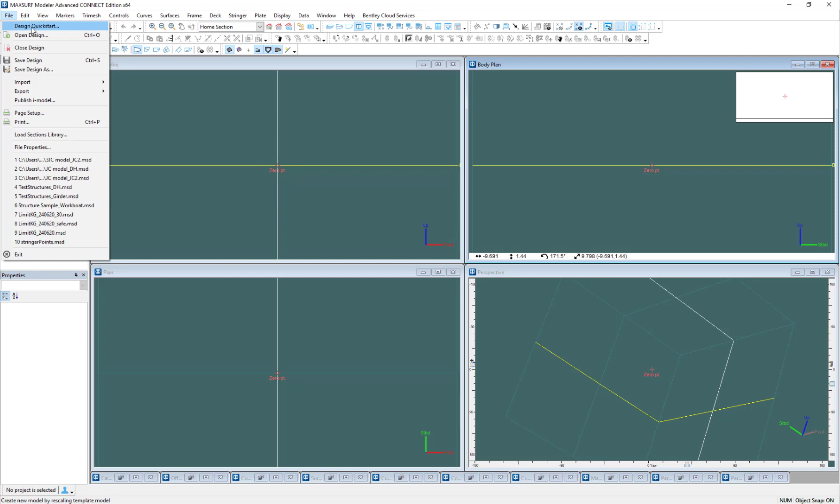Now, I've seen a few models recently where users have gone and made some very complex setups for doing boundary surfaces for complex tanks, and it doesn't need to be particularly complex. So I thought I'd just walk through what we need to do, so you've got a better idea of it.

Sorry, curves, linear curve here. So I'm just going to create a boundary tank like this. Everything's locked, so just my curve is there. And then I can extrude that 80 meters forward. Let's take a quick look at that in my perspective view here. So that's what I'm looking at.

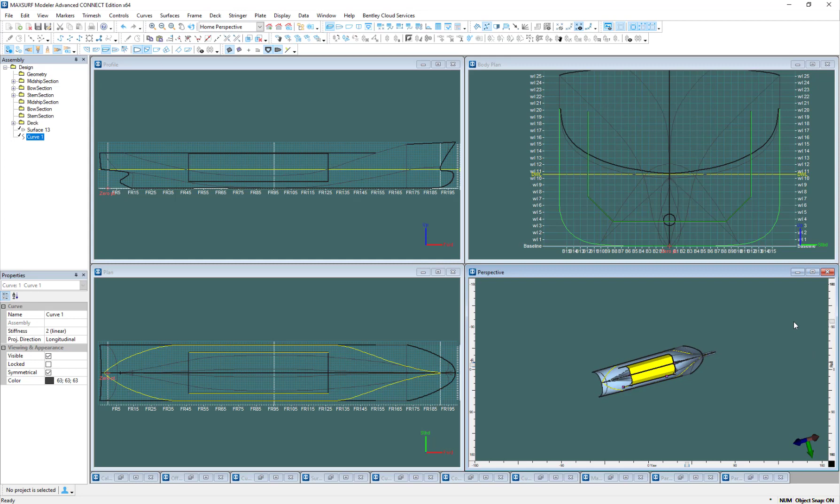Now, actually, I think I'd like to put a bit of shape in there so it tapers towards the forward end. Maybe it needs to go further forward before I do that. So here we can see that it's sticking outside of my hull. So I'm going to add another column of control points here. And we can see it's gone and tried to put in a row instead. They're the wrong way around. So let me transpose that. Swap column axes.

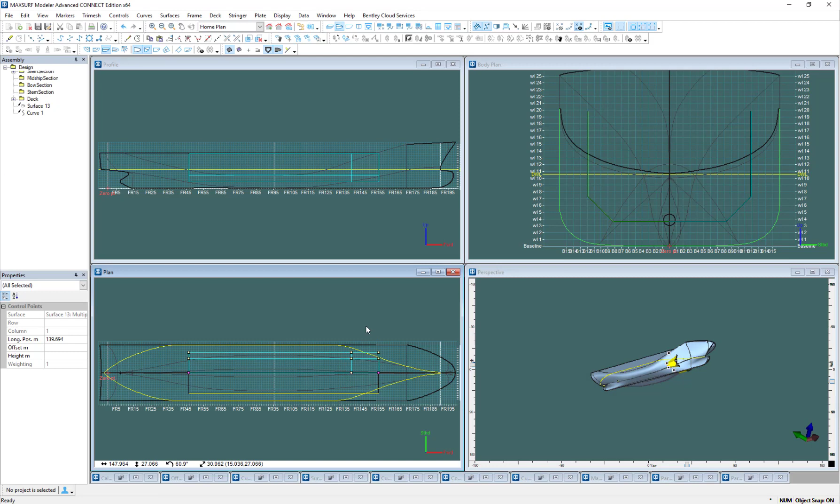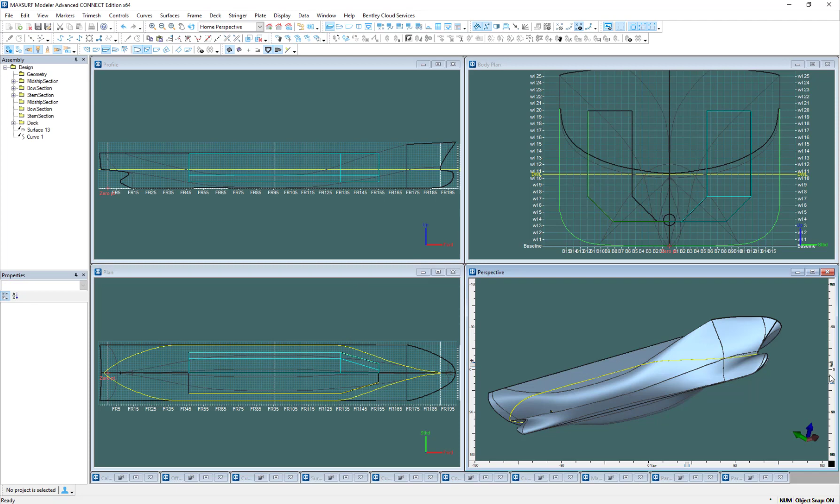Control A is my shortcut for adding. Now with my net on, I can see that's all nice and square. These ones can come inboard. So now it's not sticking out through my hull, oh, it is a tiny bit there. Okay, so that's the shape of my interface between my inner tanks and my wing ballast tanks.

Now, if I want to create a tank on the inboard side here, then let me lock everything. If I want to make a tank on the inboard side here, then I can do it with just using this one boundary surface, and MAXSURF can close one gap. So it'll know where to close that one gap. And with this, it'll be a port and starboard side surface in Stability, but we'll be able to create that inner tank with these chamfered edges.

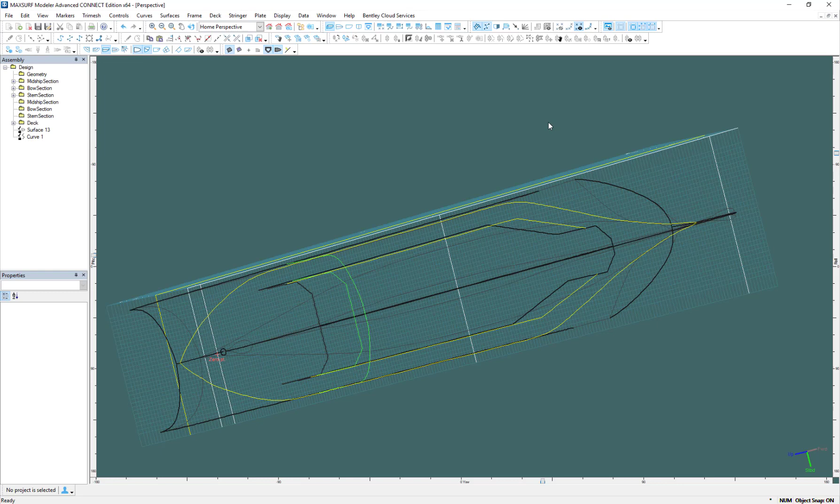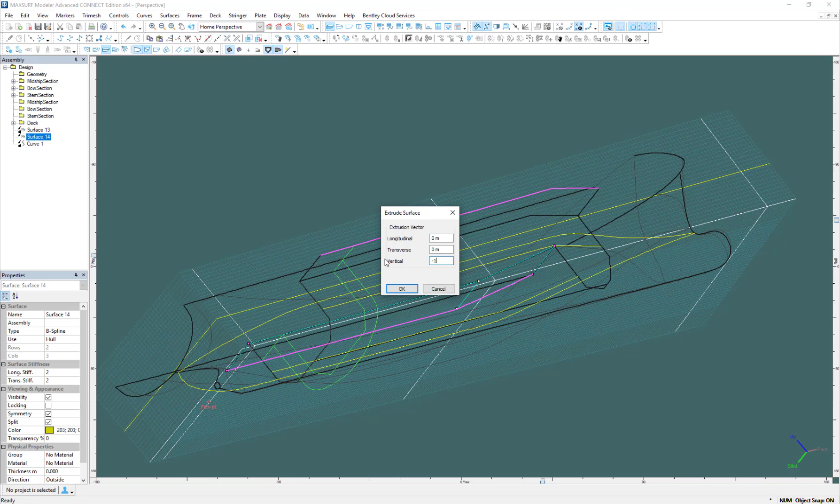But for creating this outer tank, we need to go and create some dummy surfaces that will run outside the model so we can specify where this tank goes. So I'm going to keep using that extrude command here, render off so I can select the edges of surfaces. All right, let's go 10 meters outboard, should put me well beyond the hull. This time -15 downwards. I'll check in a minute if that was far enough.

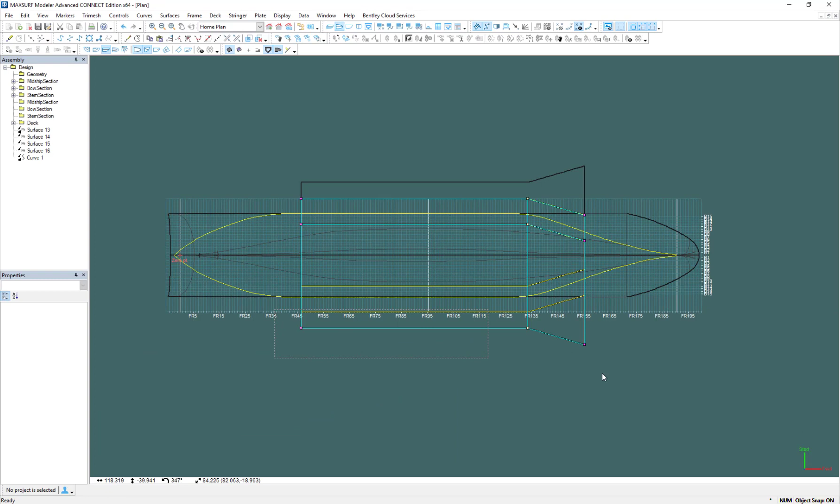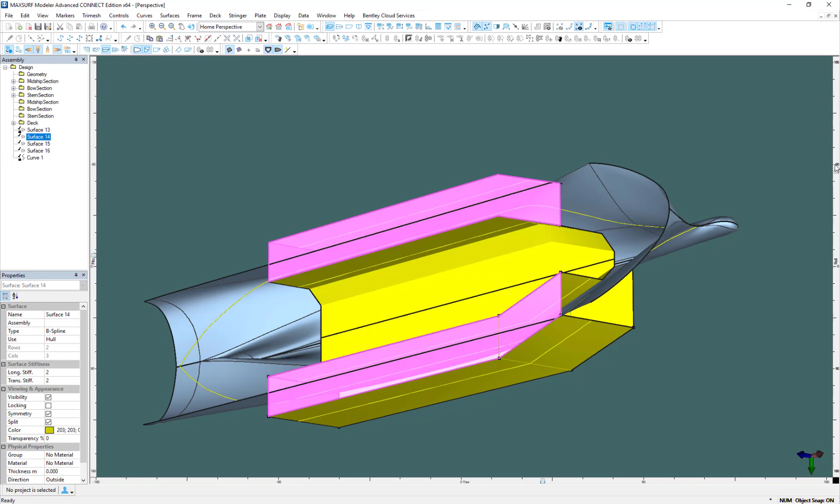Surface, extrude surface, and transverse negative. I'm going to go well beyond that center line, and I'll show you why just here. Because I've gone well beyond the center line, it's really easy for me to grab those control points, snap them back to center. Let's have a look. And yeah, as I suspected, that hasn't quite gone far enough. So let's have a look at what we have here now. These are my dummy surfaces that sit well outside of the hull, and there's my hull.

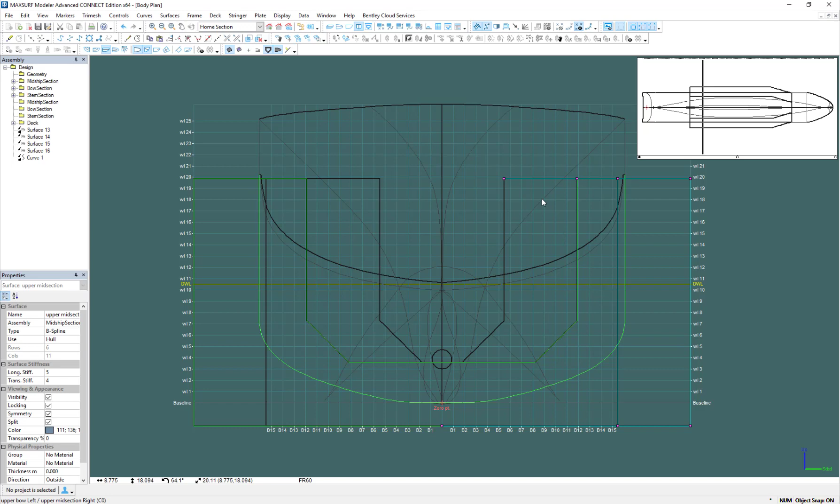So when I go to create some wing tanks that sit within this region, I'm going to specify my dummy surfaces are the extent to that tank, and MAXSURF will know that those tanks don't stick anywhere beyond the outside of the hull, so can also snap to that limit too. Now the other one that we can do is to specify parameters on the extent, so how far forward or aft each tank can go. So this doesn't need to be separate surfaces for each tank, we can use the same set of boundary surfaces for our port and starboard and for several tanks along the length of the vessel as well.

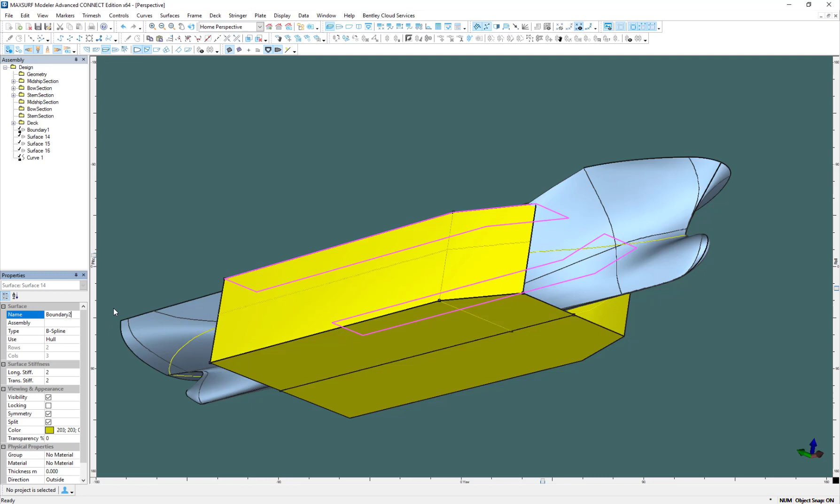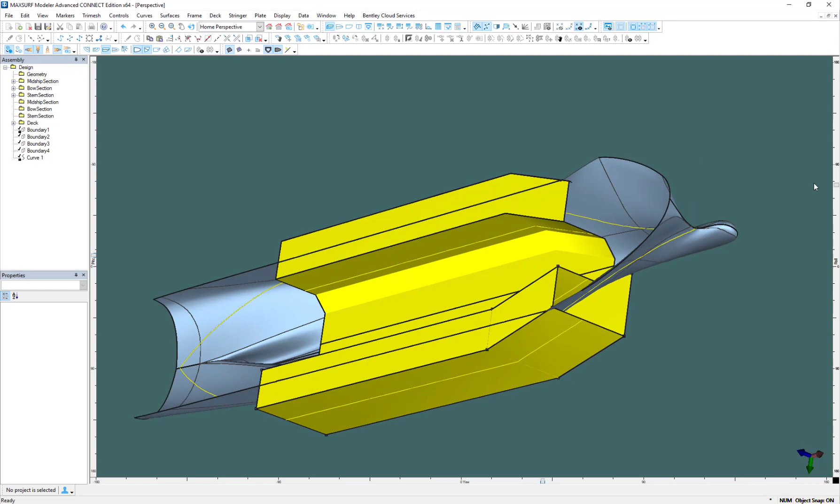So my final step here is that for these to be boundary surfaces, it helps to have a useful name. And we need to set their type to be structure. So for it to be a boundary surface in Stability, it needs to have a structure type. Okay, so let me save this and open it up in Stability.

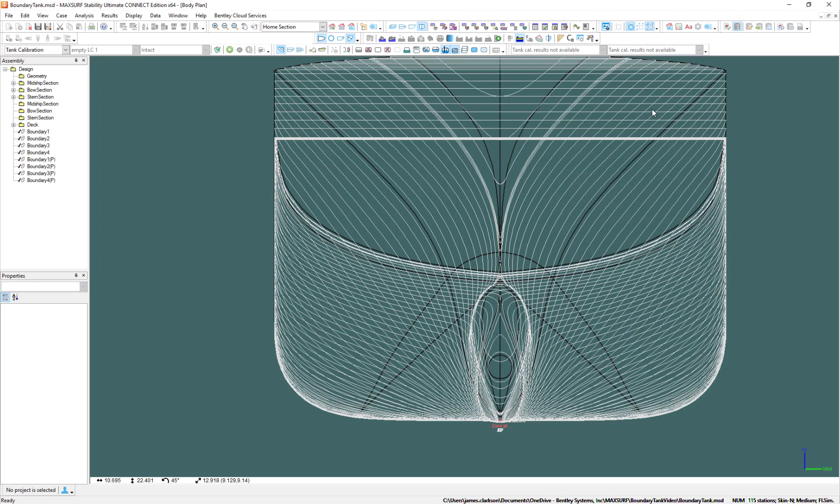So here I am now in Stability, and you'll see this model is currently just my outside sections. Those sections all look like they're formed correctly. It is always worth checking using the arrow keys here, looking at one section at a time and check that every single one of those sections is formed correctly. Okay, so if I turn on display of my structure surfaces, then I can see them there. And I can also see them in my list here.

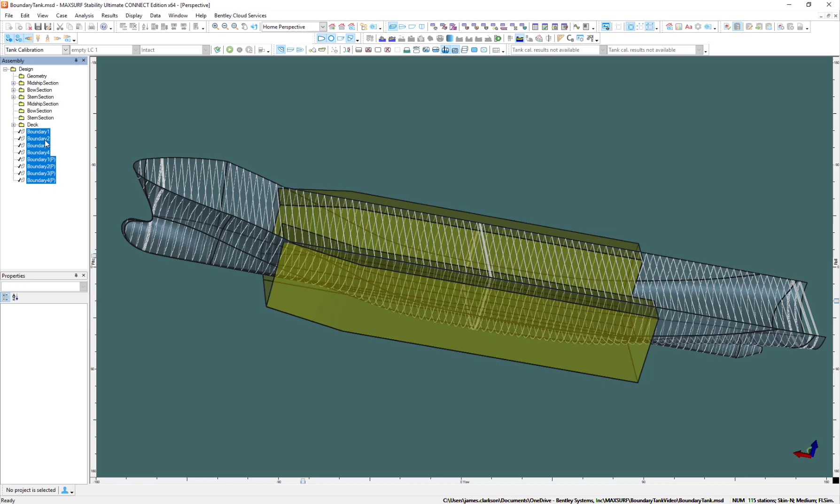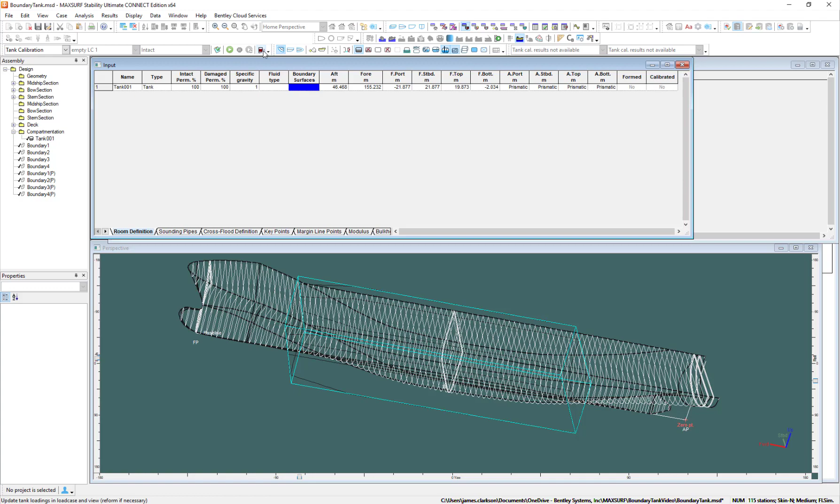So using the Shift key to select them all, I can select Create Tank from Surfaces. Those surfaces have disappeared. Let me turn on display of my tanks. And that's the extent of our bounding box for that tank. So let me flick across to my tank definition. And we can see that's our tank. And these parameters are the outside of this box. Now, when I form this tank, that tank now snaps to the shape inside of our bounding box.

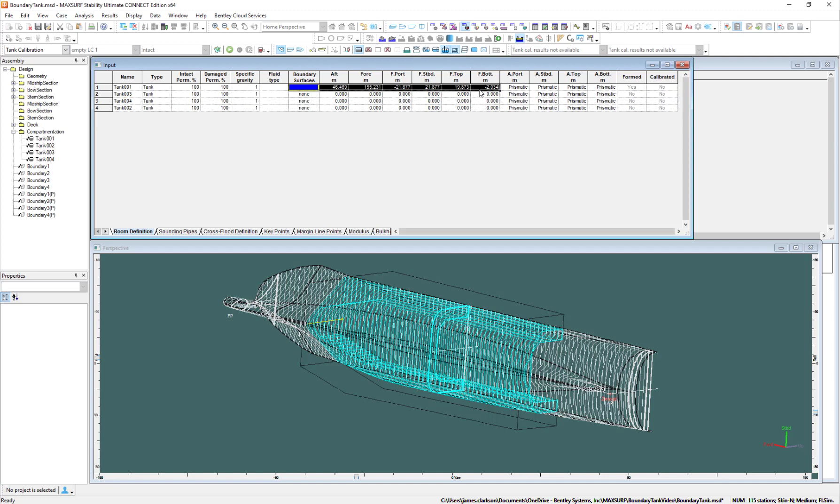Now, we don't want to have one tank that goes port and starboard, one tank that goes the entire length of my hull. So what I'm going to do here is Control A to add some tanks in. And I'm just going to copy these parameters here. So I'm using those same boundary surfaces. If I double click here, you can see those surfaces are selected. And I can change my port and starboard to go from 0 port to 0 starboard, 0 port to 0 starboard. So now when I form it, sorry, I've got too many tanks there. I can go from there to, let's pick a number.

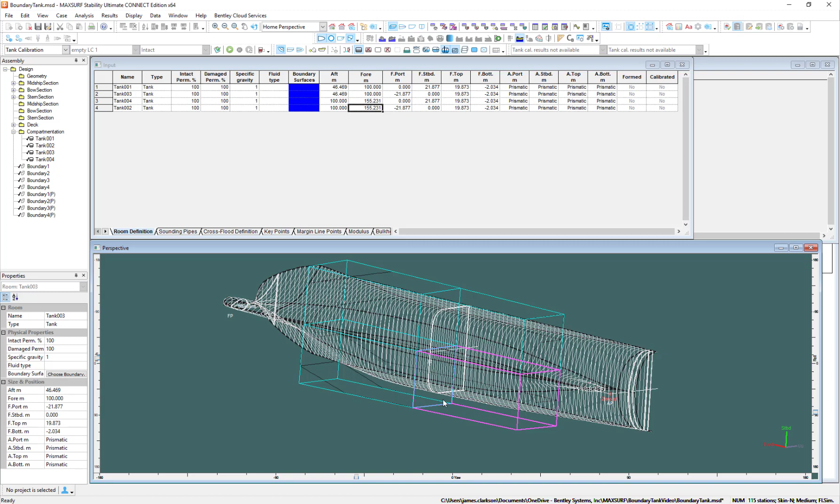Now you'll see as I've been typing these numbers, these sizes and shapes have updated. I can now see I've got 1, 2, 3, 4. And they're all using those boundary surfaces. So when I form them up, I now have my 4 tanks all using the same set of boundary surfaces. I haven't needed to go and define new boundary surfaces for each one. So all using the same, but taking up different space in the hull because we've specified different parameters in here.

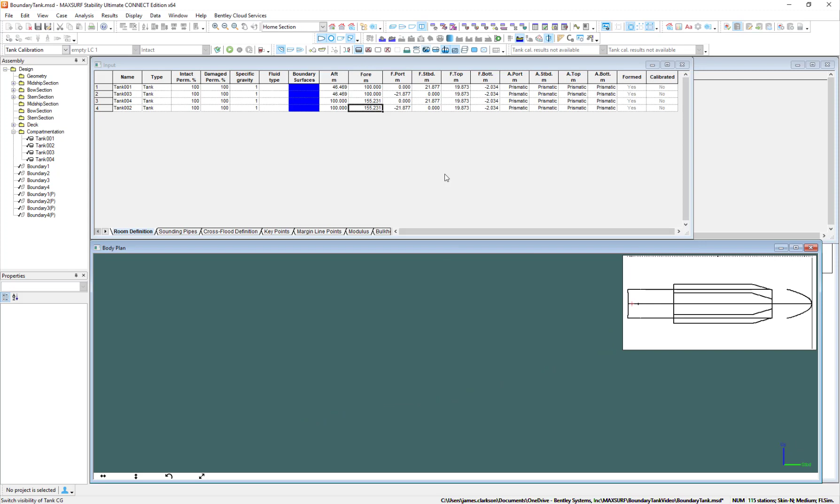So the two things to take away are, one, don't overcomplicate your model. Don't go creating a new surface for every single tank, a new set of boundaries for every single tank. You can do it in one hit. And two, make sure you do have that closed all around volume. Oh, not coming up there. That closed all around volume so that we can create a closed section that goes all the way around those boundary surfaces.